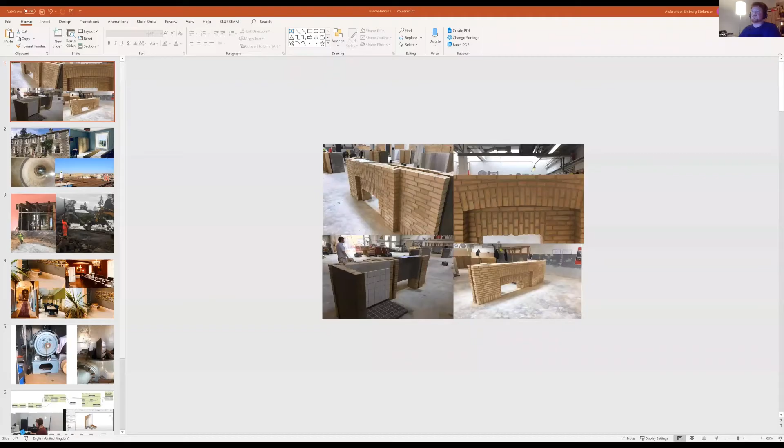Thank you very much, Aske. I'm just quickly going to share my screen here with a few pictures throughout my working career. A young man from going to the UK and doing bricks - yeah, I'm a brickie by trade. Started out working construction at a fairly young age, and I've got some great experiences throughout this.

The quite oddball in my career was that right after I finished my apprenticeship, I got offered a project management position in Scotland, renovating a large estate. So these are some pictures from my final exam as a bricklayer, and I'll take you right in through to some of the more interesting stuff.

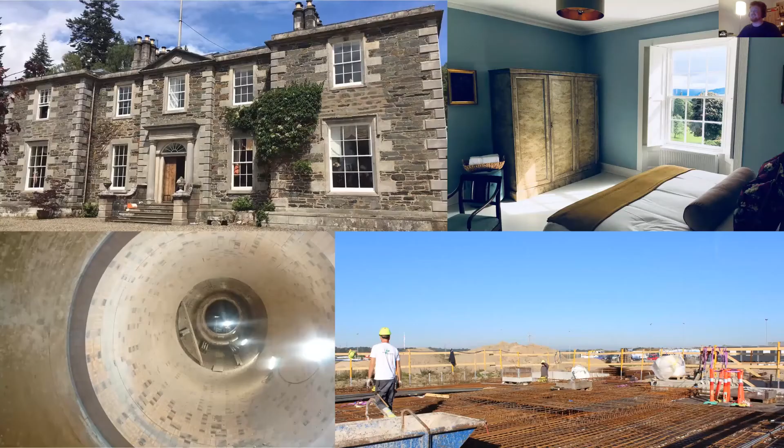You'll see here Balnakeely House, a large estate home that we renovated from scratch. Essentially we kept the climate shell and all exteriors, renovated them and gutted the whole house and started from there. You see a start in the top left and a finished room in the top right. There'll be some other before and after pictures. Then in the bottom, you'll see some of the more industrial work that I've done.

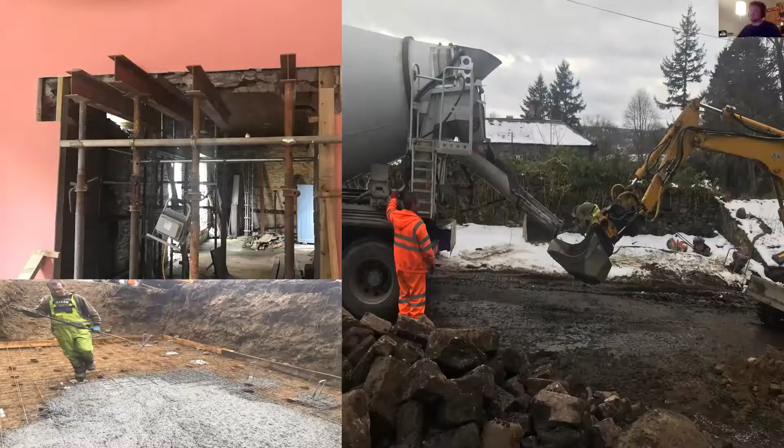One of them is a kiln in Denmark, burning clay aggregates, a really used building material in Denmark, called Leca. And in the other picture, you'll see me working on tying a lot of rebar for some very large decks at a hospital. So I've worked a lot hands-on with the trades, which gives me another insight than a regular project manager into the ins and outs of how the work is actually carried out.

Because yeah, I mean, when you start it, you work it, you know it, yeah.

So here are again some pictures from Scotland, all of this working in the nice weather you see. It's almost like Denmark. I can imagine that in the States you have a little more sun, guys, but in Denmark it's kind of like this weather at the moment.

It's quite soggy. So a lot of hardcore hands-on work was kind of your background before you joined the AEC studies in Denmark, I can see.

Yeah, indeed it was, and while we're just resting on some of these nice pictures from the finished project, I will quickly talk about when I moved - like when I was in school as a bricklayer, we obviously learned AutoCAD, which was kind of my view into the more modernized way of building and construction. So after I'd finished my bricklayer's education, worked in Scotland for a couple of years, the next step was to take a more technical education.

So after this, I researched a lot of schools. I really had 4 schools I was looking at, where KEA, the one we're all attending now, was one of them.

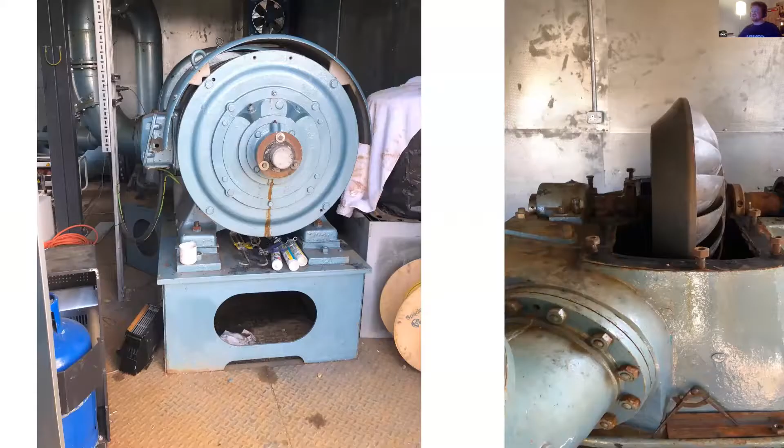Sorry, I will just quickly talk about, in Scotland we have this hydro scheme, renewable energy and everything. So a water mill that turns out electricity. I forgot I had this slide. I'm sorry about that. No problem.

So back to school, this is me sitting at school. Being in school, I really get a buzz out of working with the data handling side of construction. It's really cool for me that we have some definite problems in construction, and I see our solutions to handle this mainly being within our modeling, our information, our data handling, our U-value calculations, our CO2 footprints, and everything. So that's what I get a buzz out of for this education.

I also really do enjoy, which is a good thing here at KEA, that you kind of are expected to find your different workflows, how you are working with the AEC studies.

I also personally get a good buzz out of the sustainable solutions. I know the girls are going to talk more about that, been touching on it. Yes, in my student job, I'm also working with a company that does a lot of solar panels. So that is really cool for me, doing big solar farms and wind farms.

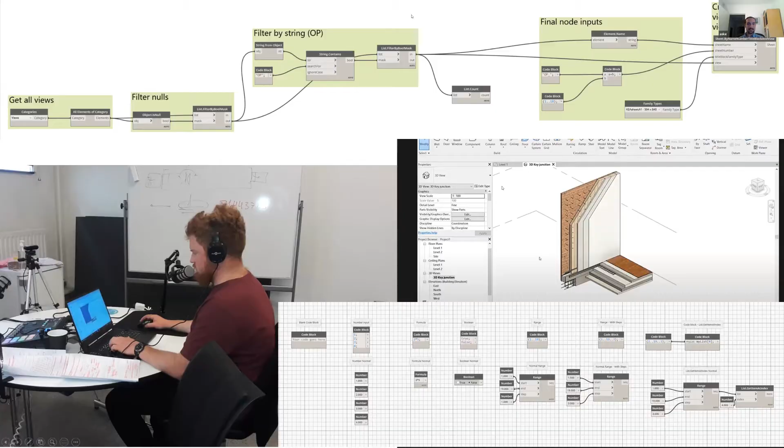And the next guy is Krzysztof. Krzysztof, you are from Poland, and you're also studying at the International Bachelor of Architectural Technology and Construction Management in Denmark. You are a little more seasoned, I know you have 5 semesters behind you, so it's almost 2 years. But you also have great knowledge on both the technical parts and aspects of the education, as well as the more artistic parts. Before I let you speak, I just want to say to everybody out there that this guy draws amazing drawings. I remember my first weeks at KEA, looking at reference drawings from older semesters, and you would see this guy's second or third semester drawings. Amazing work, looks like something I haven't even seen the industry show me yet. So that is exciting, I hope maybe if I'm lucky you will show something. If not, then I'm just looking forward to your story.

So, 5th semester at KEA, former educational approach as a concreter. Krzysztof, how is it being on 5th semester at KEA? It's actually really great, it went really fast to get to the 5th semester. 2 years have gone so fast that I can't even remember most of it. But as a former concreter, even though I do not have as much experience as Alex, I still managed to get some education before joining KEA.

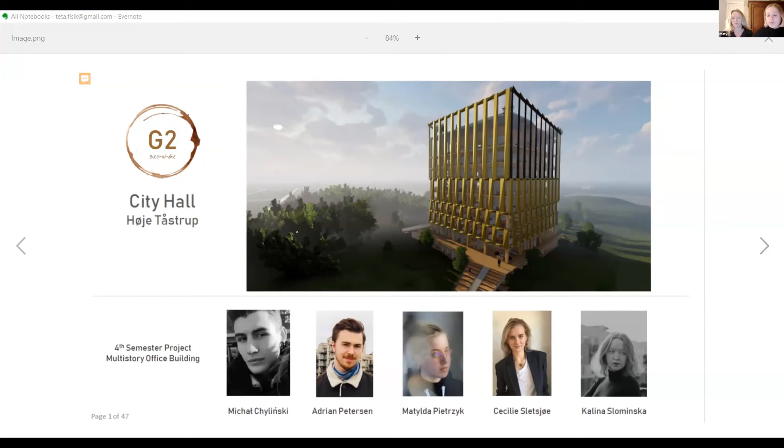A little technical - thanks to being able to work with BIM and Revit, we created those models: one architectural and two structural models, one in timber, one in concrete, one HVAC, and then we were able to compare those two, timber and concrete, in terms of CO2 embedded carbon, thanks to schedules basically, and creating Revit families that include the embodied carbon in the Revit families and all the structural elements.

Now with BIM, we can actually show it in a model. And also the structural model, we could analyze it with Robot, which is a great tool for technologists to make initial structural analysis once we have the concept, so that there are fewer errors once the engineers are also involved.

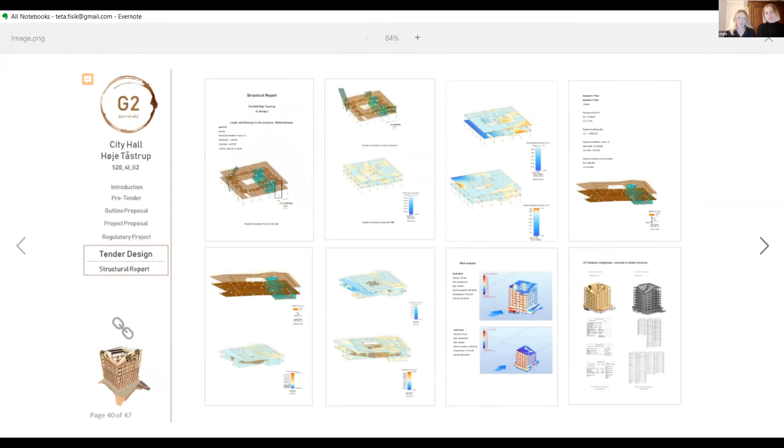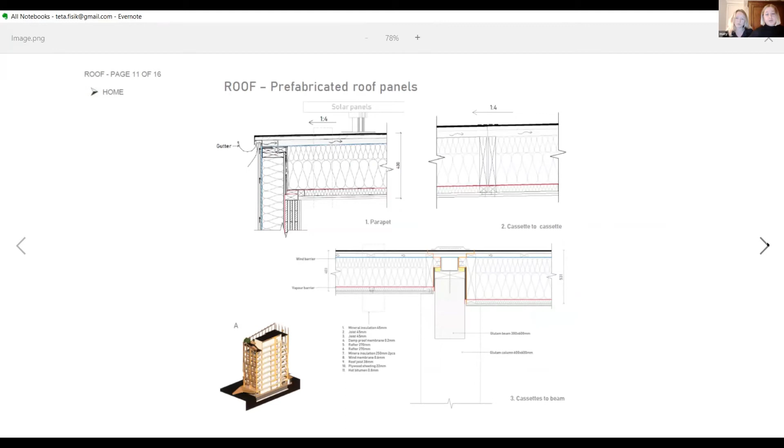That's also a big part of it, being able to analyze those materials that you're actually going to use. It makes it easier for you to experiment and use new materials that are also new to the industry, and to realize early in the project that, okay, this solution is not possible, for instance. So thanks to our lectures, we were able to develop some good technical details and connections, and just comprehend that we can build multi-story buildings with timber, and it's doable and it's good.

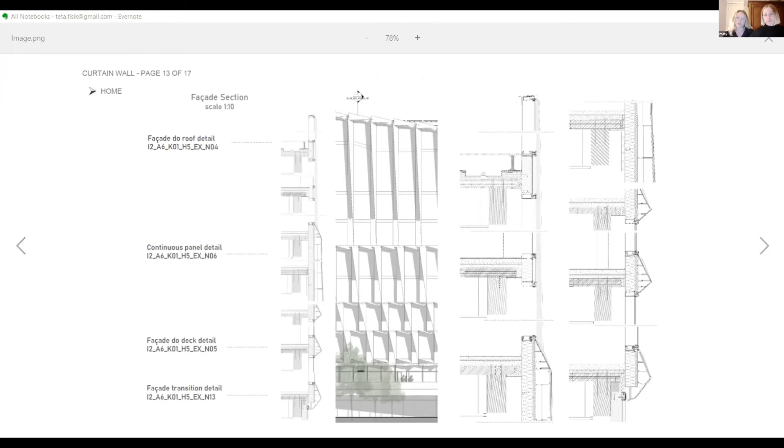That was very good. Now, why is timber more sustainable than concrete? For me, the most convincing element is that we cannot take out any more limestone from our earth - not only because we don't have more that we can take out, but also lime is a big part of concrete mixture, and burning limestone to create lime is 8% of all the CO2 emissions our population is making, which is huge. It's more than all cars and ships combined.

So that's a no in terms of global warming, but also wood makes construction very flexible in terms of modular building, and it can make it way quicker than, for instance, concrete construction. So these are the three main goals that I think are pretty important. But of course, we are students and we still learn, and we can still question.

To ask you about that, seen from a student's perspective, what is the industry waiting for? I know this is a big question, and many companies are trying to push the timber revolution of the industry and so on, but yet some companies and some countries choose to focus infrastructure, for example, on heavy concreting. So what are people waiting for?

I would say a lot of people are afraid of the cost, which can be seen as - I mean it might be higher in a lot of cases if you just compare the cost itself, not the quality of the building or the lifetime of the building. There are many factors affecting it, but also building regulations. And construction industry is pretty conservative, and people like what they know and are sure of.